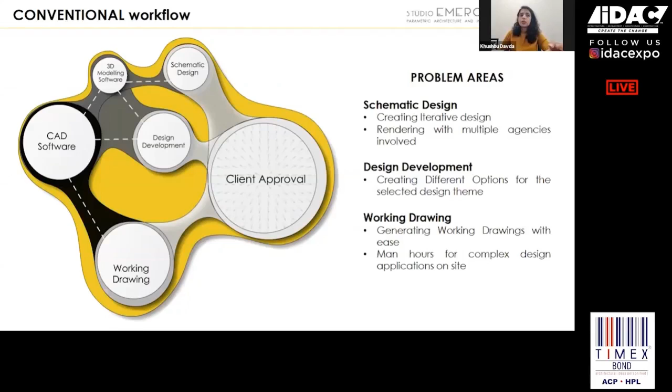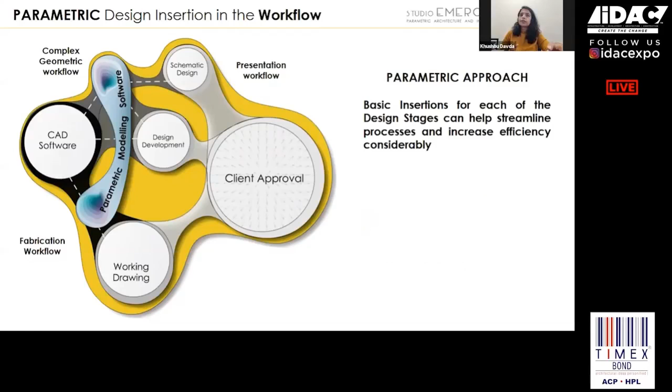But with the help of these newer technologies, called the parametric design approach, there can be a feedback loop in such a way that all of those processes which require a little bit of intervention - where there are some site changes or some programmatic changes which require changes in the design itself - this can be algorithmically approved, in such a way that you decrease the time, which also leads to a decrease in your cost.

Because the most important aspects in any building construction are A, material, and B, the timeline. So if those two things are taken into consideration, parametric design and BIM technology, both of these, when they work in a feedback loop, the output that comes is the most optimized version of the design process.

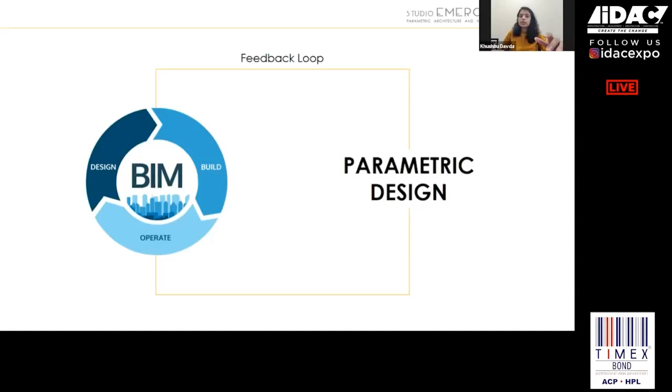When BIM was completely new, the early adopters actually gained a lot from BIM technology, because they could create really informative 3D models which helped in the final construction. What parametric design does is help even those BIM components, making them adaptive and creating a whole system, almost a virtual system, which can be adopted in real construction.

The first thing on the drawing board is called ideation, which happens only on the drawing board, where your architect, structural engineer, and all the people involved, even the client, are actually involved in the ideation stage.

When it comes to the implementation stage, we involve the other vendors too. Once everyone is on board in the implementation stage, you also want to educate, because once there is more awareness of why you are creating that kind of feedback loop system throughout the entire ecosystem, there will be more and more adopters of this kind of technology.

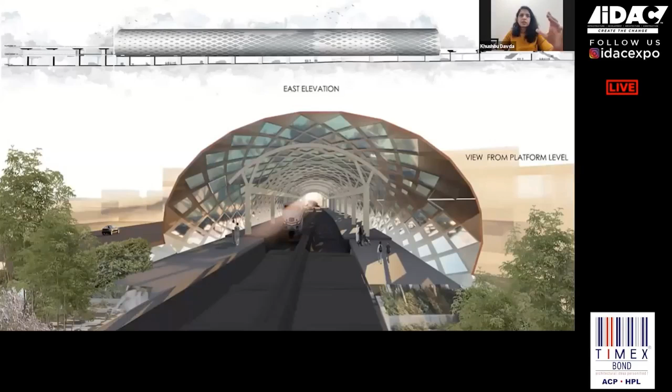So this is an example of what we did with this kind of technology. You can see this project, it's the Andheri metro station, coming up on line 7 in Mumbai. What we did here was just the facade.

You can see there is a standard prototype of these portals which are coming across Mumbai - these arched portals you can see in the center. There are 4 metro stations that were given out by the MMRDA as a design competition, and we won this Andheri metro station.

What was the concept behind this: usually when a metro station of this kind, or any infrastructure project, comes up in the middle of the city, the privacy of the buildings around it is really hampered. So we thought, why not take into consideration the people who are actually living around that right now.

If you see these apertures, we have given them in such a way that their size is directly proportional to the distance from the buildings. So if you see these two sides, the buildings are very close, so the aperture sizes are really small, and you can't hardly see anything inside.

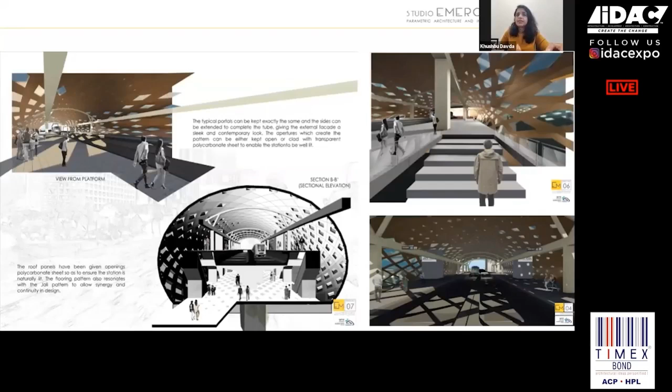Whereas over here, there is no building on each side, so the aperture sizes are big, which also results in giving a very dynamic looking structure and creates these dramatic shadows, which can create a pattern on the inside of the station.

We have given these glazing details, and the different sizes can of course be fabricated digitally and added onto the facade of the metro station. We are hoping that this will finish construction by 2021.

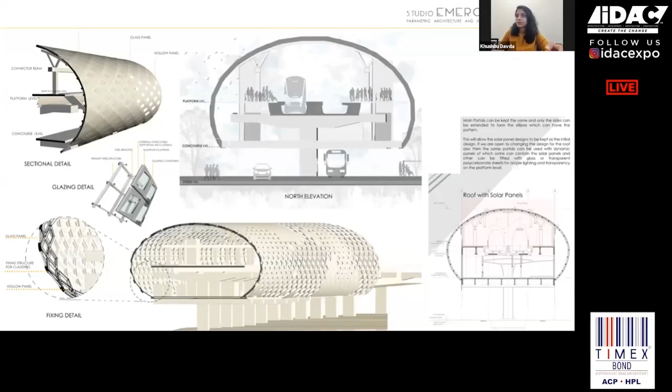So going to optimization of form. We already saw how we can create privacy with the help of this kind of technology. Optimization of form is really necessary.

This is a building in Marol called Raheja Platinum, done in conjunction with IAG Architects. We were the parametric consultants for this. The problem was this building was almost already constructed, and we had to do this Corian cladding on top of it.

Now, Corian cladding, as you must be aware, is a very expensive material. So creating an optimized version for this building was really important, especially because the water tank and everything was already built. The original design proposed by the architect was not really fitting because there was some mistake on the site with regards to the OHT, so it was coming a little outside.

It's a very common phenomenon - we have always seen that Indian contractors make some mistakes on site, and of course it's human. So how do we correct that? To do that, what we did was create an optimization algorithm.

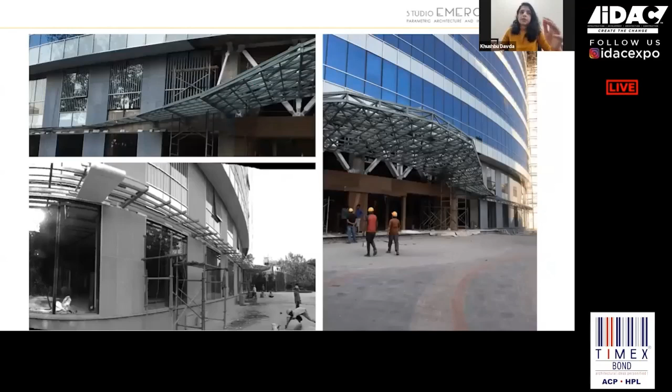We also did the canopy for that, but this was from scratch, so we had a free hand to do any design which was possible. And of course, we have used Corian, so doubly curved surfaces are very easy to do with Corian. This is how the building is completely constructed, and right now WeWork has occupied this building.

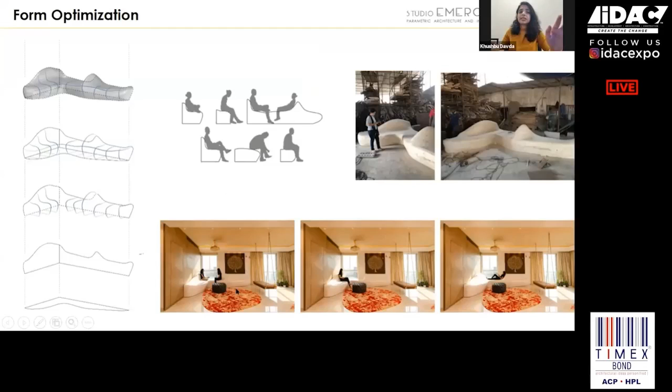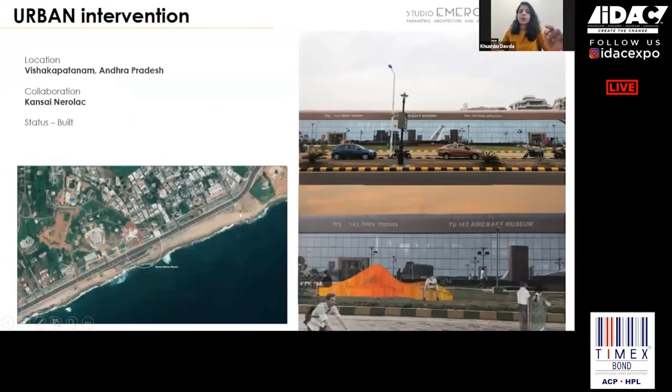Similarly, what we do is we keep on doing these experiments to understand what we can use in a facade. These are cement composite panels which we have created for an urban installation. This is outside a museum in Vishakapatanam, one of the most famous museums, which is the Aircraft Museum, and there's a submarine opposite of that.

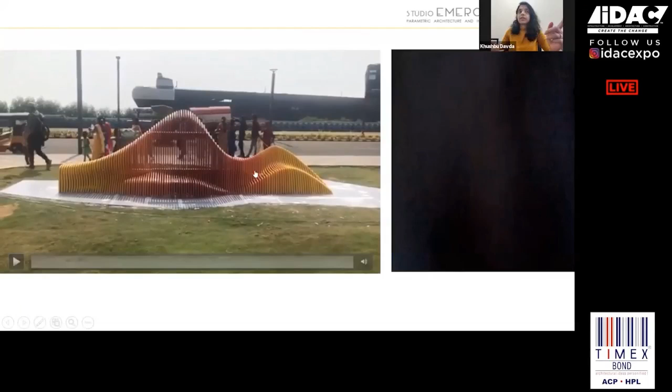This is a very widely used public space, so we have created these really colorful cement panels. This can also be used on facades. This was an experiment done with Nerolac for the CSR projects.

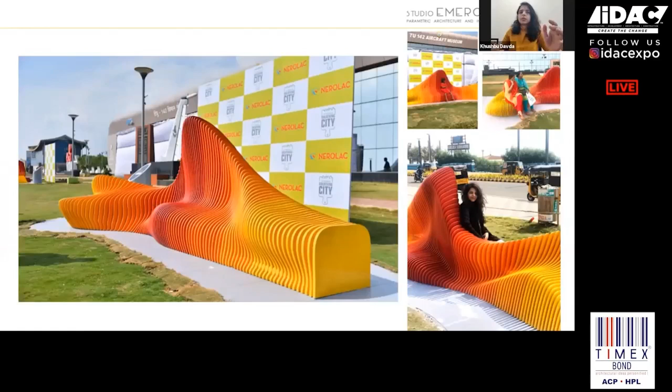We do a lot of these experiments because form finding is something which is really required at the conceptual stage. If you don't do that, you don't really understand how the structure can perform much better than it used to. So there's a lot of parameters that can be taken into account depending on the context of the project, obviously.

There is solar, there is a structural component, then there is panels, because the panel sizes of say glass or ACP or any material which we use, they are all fixed. So if we have that panel component also as a parameter, we can actually create the structure in such a way that the panel sizes will be optimized for that, similar to what you saw in Raheja. So there are all of these different techniques we use.

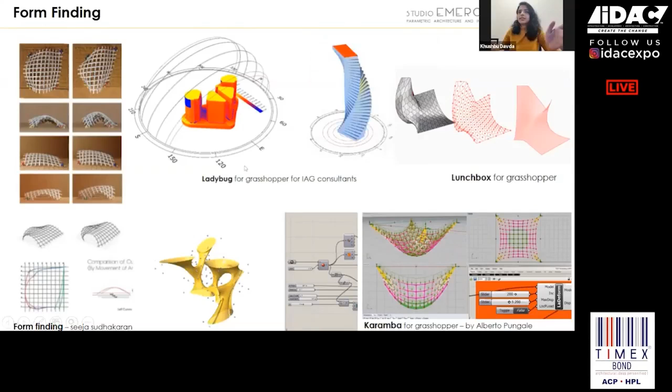I'm going in really short because we have limited time. Again, we are doing this project with IAG consultants where the building core is already made, the basement is already made, and the function of the building actually changed. So you can't really go back to the drawing board to understand what can happen.

So what we have done is, with the help of this technology, we have optimized what all you can do with the facade. We have given like these 3 options with the same kind of column placements. Actually, the columns only change on the upper floors, and there are a lot of possibilities which you can do with that building.

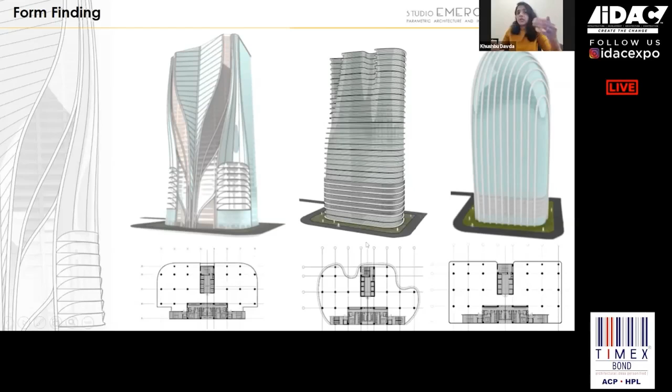This is a commercial project. It gives a more free hand to what you can do. This is a residential project. Again, this is a redevelopment project, done by us, and we are doing it with Sugee Group.

And redevelopment project, if you know, it's a very complex puzzle. So you can't really do much with the facade except for balconies. It's a complex puzzle, and you can see like a framework of the building, which is done with the help of BIM. And what we have created over here is parametric dancing balconies.

So when you go from Gokhale Road, which is a very central road in Dadar, you can see these dancing balconies in the form of these lines. And we have created those.

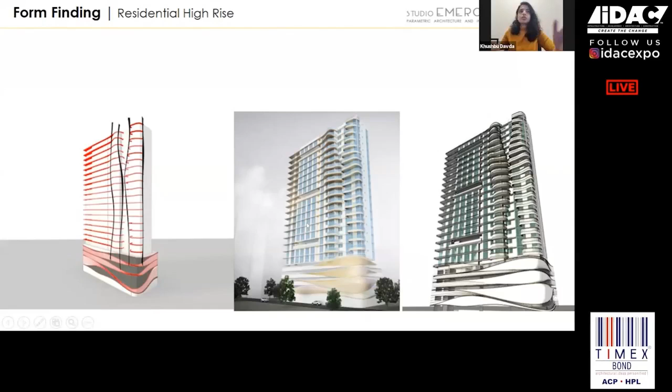And what happens with this technology is you can actually optimize or keep constant the size of the balcony. So suppose if the developer wants the balcony size to be 60 square feet for all the apartments, you can keep the size constant and just change the shape to create such a dynamic form in the facade. So there are a lot of possibilities which can be created with a facade.

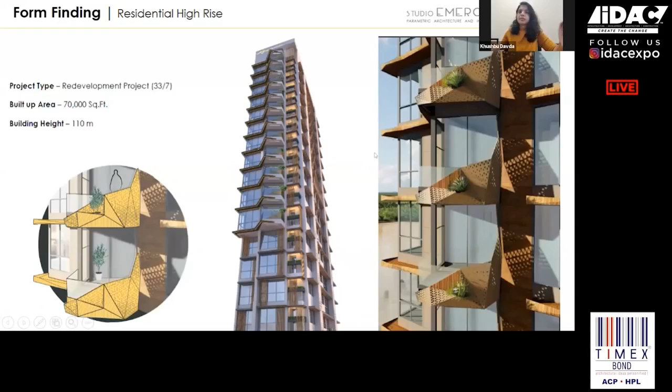Even a simpler version, like a tessellated facade, which is only optimized for sunlight - wherever there's more sunlight coming in from the south region, you can increase the size of the balcony and create these metal jalis, which will create dynamic shadows inside your balcony. And the rest can be simple. As Mumbai DCR is very strict, the rest can be kept very simple.

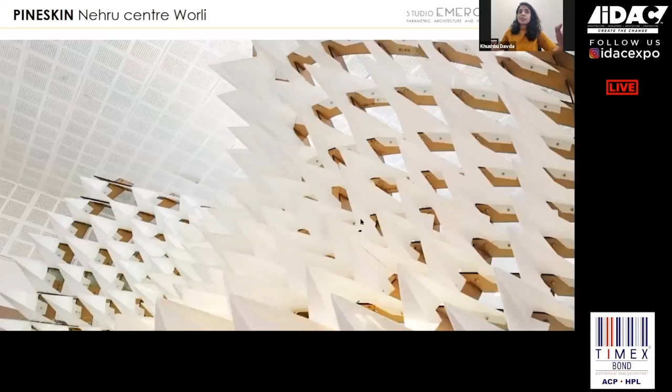For emergent patterns and solar optimization, climatic intervention is the most important. While we do a lot of studies in facade technologies, we have tried to understand how we can create new components in different materials which help in creating facades that are dynamic looking, but not necessarily moving. You definitely have a lot more economics when it comes to countries like Dubai, where facades can afford to be moving, whereas in India we haven't reached there yet.

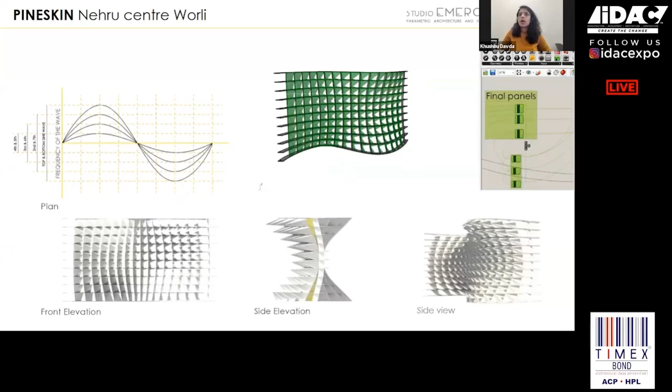So what we have tried to do here is understand optimization, that in a given region, if you want sunlight to come in maximum during the winter and minimum during the summer, how do you do that? This experiment was for that, and it can be applied to a larger scale module of, say, a commercial or institutional building. We did a small prototype to understand this.

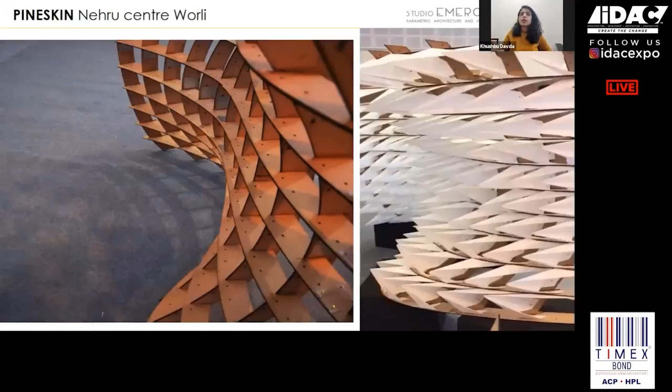We have used this sine curve, which was a self-stable curve. There was no support required for this. These cones are all digitally fabricated, each completely different in size, which gives you this dynamic shape. So there's a lot of prototyping and experiments required. At the end of it, you get a much more performative facade, which gives you a building that actually breathes with the humans inhabiting it.

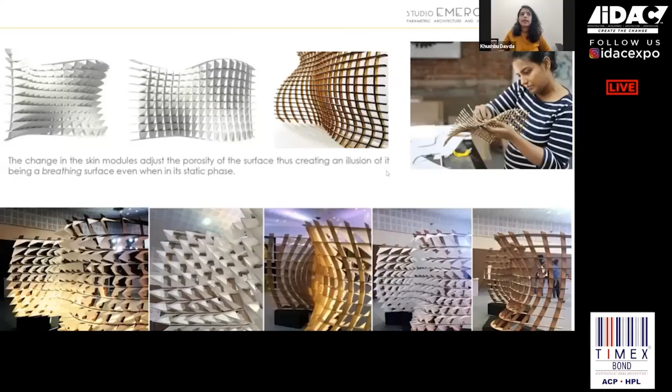So that's how I want to conclude. Collaborative practice is the future, and unless we all come together to create better and more performative buildings, we won't be able to get into a position where we are more sustainable and using as few resources as possible. That's how I want to conclude.

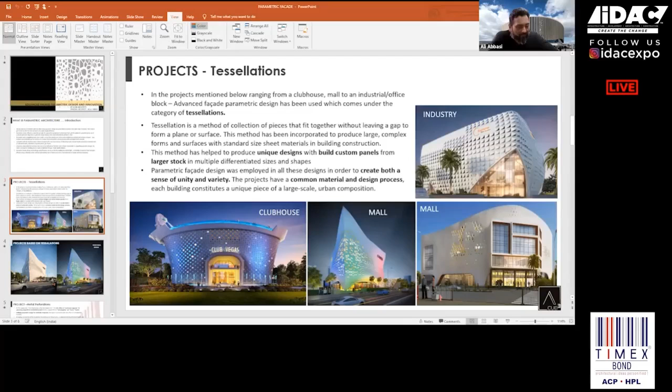If you ask many architects, everybody would probably have some kind of different definition, and that's due to the fact that there's a wide-ranging definition to it. So it's a facade in which the parameters are set, and they have a certain algorithm that is there. The parameters can be daylighting, heat studies, airflow, and these are basically analyzed and modeled using software. We can conceive forms that were previously impossible or impracticable to execute or imagine.

It's also because of the advent of computers that we're able to attempt these kinds of complicated forms. But at the same time, there's an improvement and increase in the ease and economy of fabrication of some of the newer construction materials. You have solid metal sheets, aluminum composite panels, FRP, GRC, Corian, and these kinds of materials which are easier to fabricate and construct.

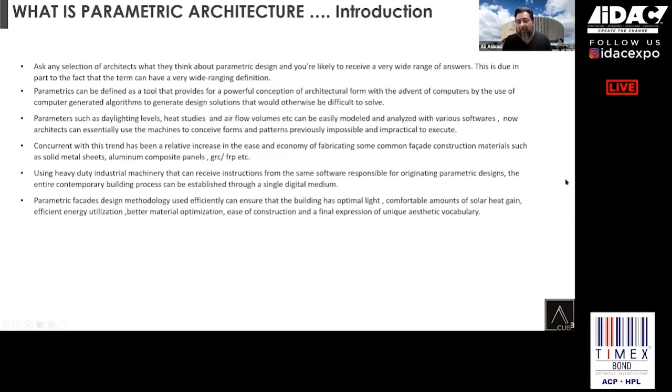And the software used to design these parametric designs is the same single digital medium used to control heavy duty industrial machinery, CNC cutting machines, and other machines that give you the accuracy and performance for doing a parametric facade. Overall, by using a parametric facade design, you ensure the facade has optimal light, solar gain or solar shading wherever required, and optimization of material use because materials are used more economically with minimum wastage. Over and above, you have a unique building which gives a very different aesthetic to the entire project.

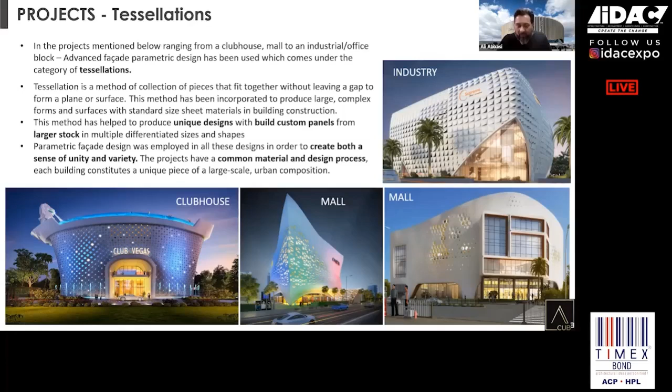Now I'll run through some of the projects we have done in our practice where we have attempted to work with parametric designs. These are wide-ranging. We've tried it in clubhouses, malls, industrial offices, site offices, and parking buildings. So in our own way, with whatever constraints are there, we've tried to come up with unique designs which have parametric design in them.

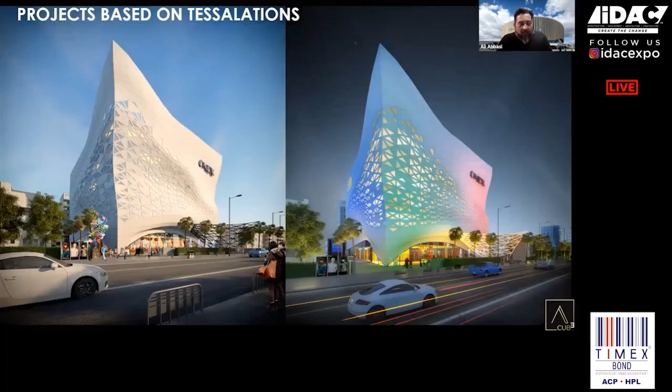So this is a mall we have done in Kolkata. It's designed in Kolkata and under construction, where we've used tessellations. Tessellations are a skin where we have various different sizes of cutouts and openings to ensure that the privacy and light coming into different areas is different.

And we have a play of light and volumes. In the retail areas where we want maximum visibility, we've actually created more openness. And the whole building has a different identity. The point was to create a very different identity for the building, which would be an attraction to the end user.

This is a clubhouse that we did the facade for, and it's a double skin with a mixed use. So you had banquets, gyms, tennis, badminton courts, squash courts - lots of different activities, each with a different use and different light requirement. At the same time, the entire facade had to be seamless and integrated. So we proposed an entire facade with these openings and fenestrations, creating a wrap around the entire building.

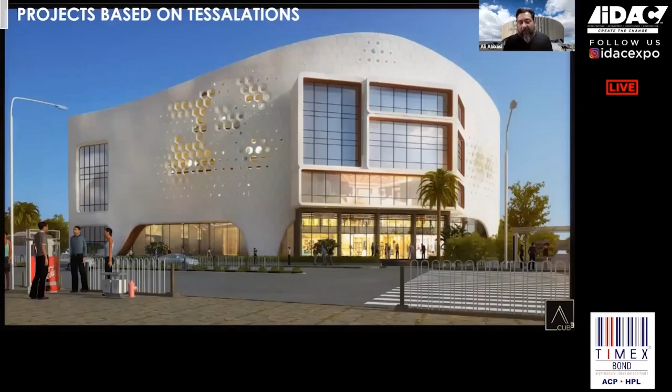This is another retail building where we've tried to have some cutouts and fenestrations and create openings to again give different purposes - visibility, light, and solar heat gain into the building.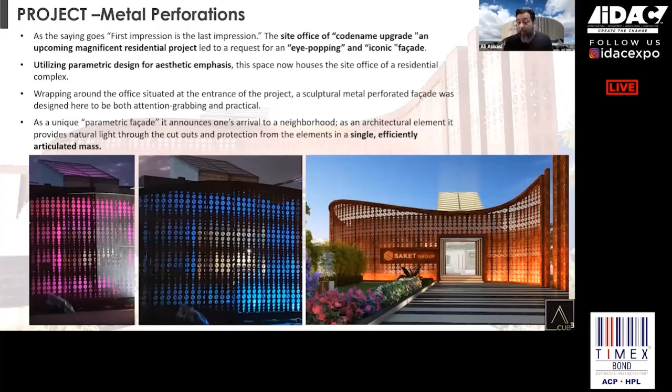So it creates this very exotic entrance which entices customers to come in and have a look at what's inside the building. Other than the normal light and other benefits, we've also got a very interesting looking facade. And at night when we light it up, the light adds another element to this whole building. And this is the executed picture of this building.

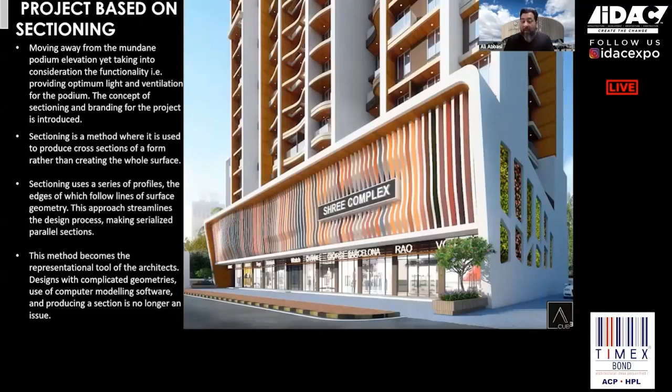So this is another building which was a parking block of a tower. The developer was very specific in saying he doesn't want a conventional facade for the parking block. So we came up with these fins which vary in their curvatures, which in their own self create this volume within. And we've played with colors on the block so that when you drive past, you have this splash of color happening, and the entire form is created with these planes.

The interesting part is that we worked this out using very normal construction Siporex blocks, cutting them with accuracy to get these curves for the entire facade, achieving this in a very cost-effective and achievable way.

So the whole point is that we want to do it, but with respect to the cost, to make something buildable. It requires that we do that value engineering to make sure that we can achieve these things in buildings.

Yes, definitely sir, and it was lovely to see all of your projects. We'll be doing Q&A after this, where we'll be asking a lot of questions on these projects too. Sure, thanks. I would request Mr. Gautam Bhasin, who is from Inhabit Group, an international facade consultancy group, to take it from here.

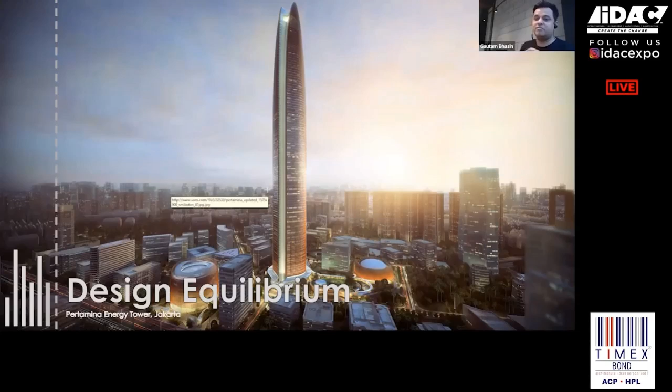But while all that sounds really great from an architectural and wind engineering perspective, it starts making life difficult for facade engineers. So what appears to be a building that's a straight extrusion for the bottom two-thirds starts changing form on the top one-third, where there's a sine curve which gradually reduces the floor plate size, but it also starts to lean back. So it's obviously forming like a double curve surface.

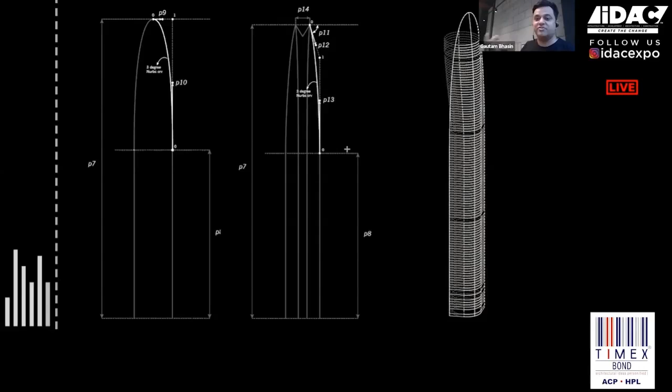And double curve is considered a bad word in the facade world, because every time you talk about double curving something, it means thermoforming - something we heard in Khushbu's presentation - or tessellating, triangulation, or other methods which are either an aesthetic compromise or frightfully expensive. And that starts getting some weird reactions from the owners saying we don't want to spend so much.

So what happens in the top two-thirds or top one-third of the building, which is a typical high-rise, about a 200-meter tall tower in Mumbai, placed on top of a 300-meter tall tower - it's basically a building above a building. So what's happening in this part is that it's reducing, leaning back, but also becoming smaller in shape, almost forming this double curve surface.

And if you try to use flat panel geometry - any material, aluminium or glass, you get them in flat panels - the minute you start to put flat panels, you'll suddenly start seeing this little shift that happens, which we call fish scaling on a double curve surface. So we figured out, okay, where do we start and what are the options, the alternatives, just so that the client can take a well-informed decision.

So when you try to imagine a big gym ball and you're trying to take playing cards or business cards and cover it up, you will start seeing a pattern like this emerging, where one corner can be joined, but then when you start pushing it closer to the surface, you start creating these triangular gaps.

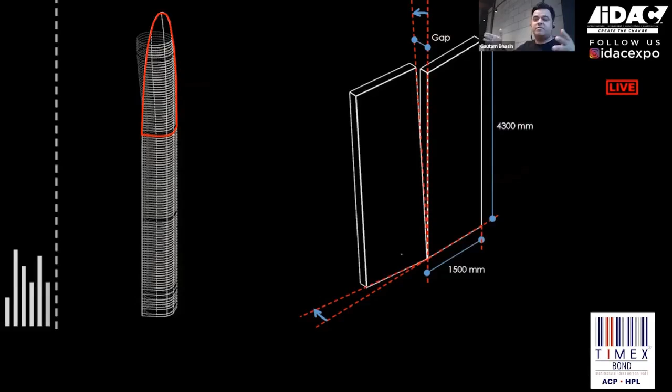So with a standard panel, floor-to-floor height of about 4.3 meters, panel modules of about 1.5 meter centers, we started looking at alternatives. How can we make this building airtight, watertight, highly manufactured? It's very modular, all panelized, comes from a factory, where you don't have the opportunity of sealing the building from the outside 300 meters up in the air. So what are our options in this case?

To wrap around a double curve surface, we looked at three aspects which are obviously very important. One is feasibility—can someone actually fabricate that? Second is what is the impact on aesthetics, because every time an architect develops a render, the client is sold on the vision. They know they would want the building to look exactly like that. And third, you have to really buy the material, buy the product, buy the facade for the building, so it should still be in some reasonable cost and should not cost you an arm and a leg.

So the first option we looked at was to triangulate it. Very simple—you have seams, you fold it over, and you can create that triangulated surface. While it's feasible, the aesthetics go for a toss, because imagine being inside an office building where every panel has a diagonal, which is a very weird experience from inside out. Outside in may not matter as much because it's sitting really high up in the air. And the cost is sort of still sitting reasonable.

You can thermally curve it. It will literally cost you a couple of organs of your body, where you have to thermoform double glazing, thermoform aluminum extrusions—very, very expensive. Aesthetics is a big tick in green because you get the surface you need, but cost, again, is very questionable.

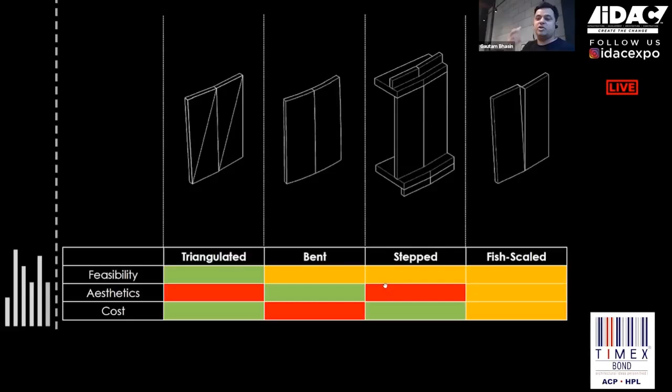And this actually helps us tick all three boxes. We're not increasing the cost, we're ticking the box from an aesthetics perspective, and it's also feasible because we're using very standard components. Again, in this case, it required a big buy-in from a large part of the market—sealant manufacturers, glass manufacturers, aluminum extruders, everybody had to buy in that, yes, I can bend it.

I haven't bent it before, but I can bend it and it works. I can still provide you warranty that the glass won't break, that the sealant will be able to hold the glass in position, etc.

So this was almost like going back to the entire supply chain. Based on the amount of stress the glass can take, based on the amount of stress silicones can take, whether the panel can hold itself up, we basically rolled the entire process backwards, and we came up to a number that you should be able to push a panel that's 1.5 wide by 4.3 tall by about 20 mm from one corner without having to do anything to that panel.

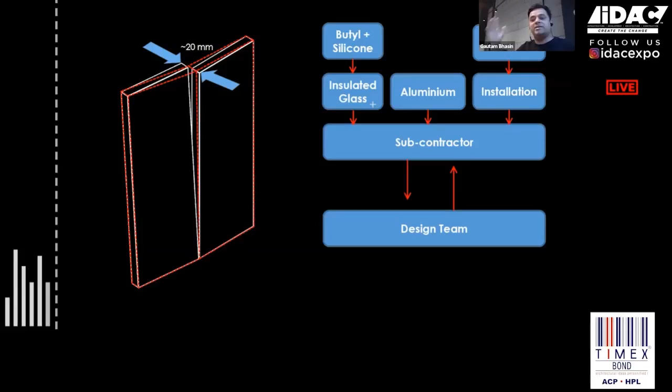So then the challenge was to actually start using the 20 mm warpability and then try and place the panels across. So we basically arrived at a panel module that was really optimum. It was allowing for 20 mm out of plane pushing at one corner. So that actually helps you cold bend the entire facade without having to do anything that's excessively expensive or not feasible. The other challenge, which I guess most of us are familiar with, is that...

Trying to optimize something for manufacturing obviously involves some level of intelligence play where you try and increase repetition in your panels as much as possible, which works wonders for manufacturers, which works wonders for fabricators, where they keep coming up with same size panels. They don't have to keep changing their machine settings every now and then to switch to a new size. Logistics works really well. One panel breaks, you have 5 spares that you can start installing.

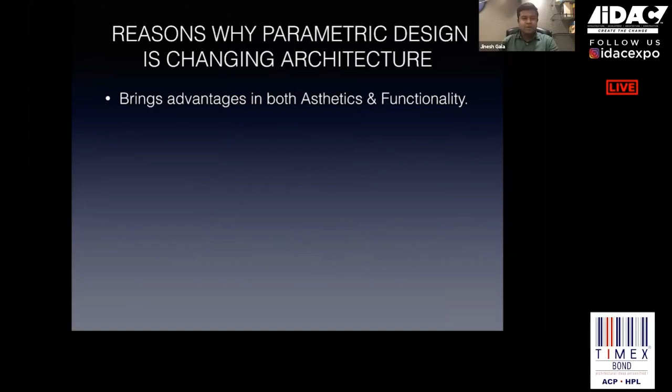First of all, it brings advantage in both aesthetic and functionality of the project. It offers a powerful tool to solve visual, material and structural issues, and even though a purely functional process will still be infused with the designer's aesthetic vision. While architects have usually formed individual aesthetic aims of their own, their design will have to solve real functional issues, and that's where these new methods come into play.

I believe today's time is the third industrial revolution, because this third industrialization is one of robotics, computation, and mass customization. Architecture will need to adopt these new processes of scripting languages and understanding of these digital processes and manufacturing.

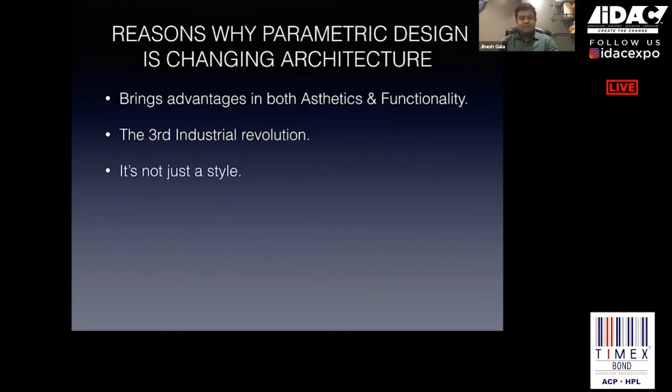Also, I believe it's not just a style or a word that feels good about. Style is always changing and following trends and fashion. I see this use of parametric design as tools and methods in the process of making really high quality and innovative buildings for contemporary society.

It allows us to manage complexities and deal with complex issues when designing big buildings or executing them. In today's time, architects are integrating these processes into all aspects of their work. Parametric architects deal with so many factors like the program, site context, user interfaces, environmental factors, material technologies, and manufacturing. It is a lot of work, and parametric design helps manage all these factors.

Manufacturing and material science: I believe research into material science and manufacturing methodologies is a growing discipline within architectural academia. A basic example is CNC machines, and how widely they are being used now, opening up possibilities for more adaptive design solutions.

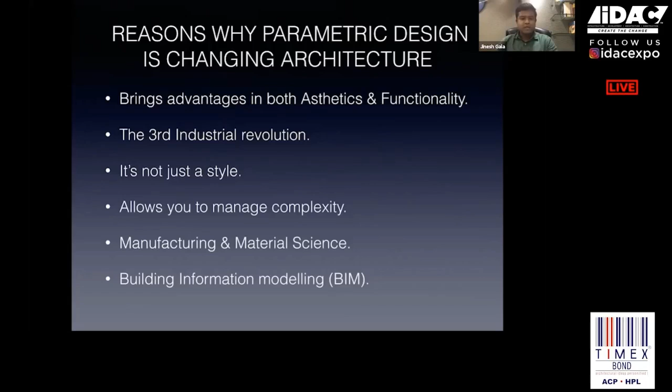Khushbu ma'am also spoke about BIM. Most designers who really look hard at their future see that, in one form or another, computational design is an inevitable part of the profession now, and BIM and other automated methods are slowly taking over the standard office tools in today's time.

We are manufacturers of one of the most widely used facade products, that is ACP. We also manufacture HPL. Since we're talking about parametric designs, I would like to talk about the fabrication capabilities of a product, because it is really important that the product is versatile in terms of fabrication so that it can achieve the design of the building.

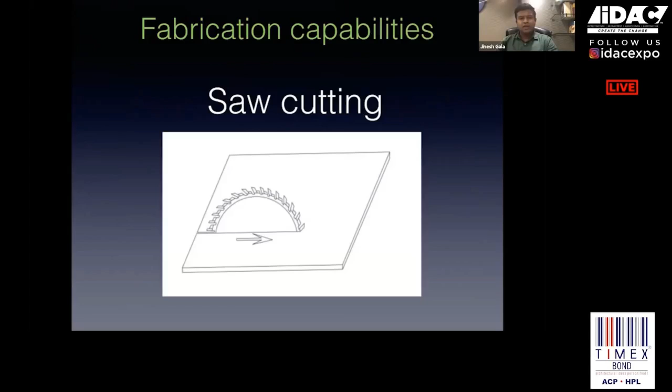Now, I would like to show some fabrication capabilities of ACP particularly. As you can see, this is a very basic method of cutting, saw cutting. You can cut ACP into any kind of shapes. It is CNC friendly, and being CNC friendly, you can get infinite numbers of designs out of the sheets. In today's time, I'm seeing so many designs where ACP is cut into different shapes and used, and it looks very beautiful.

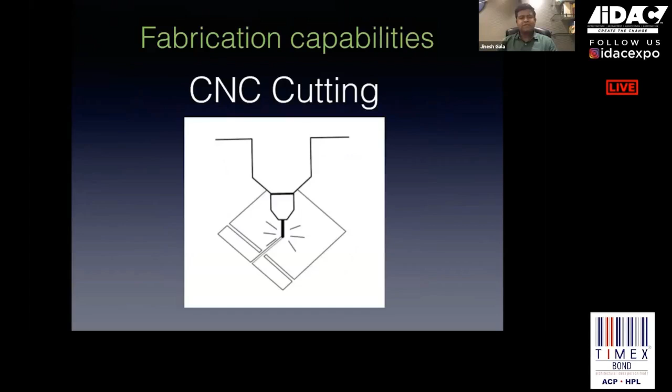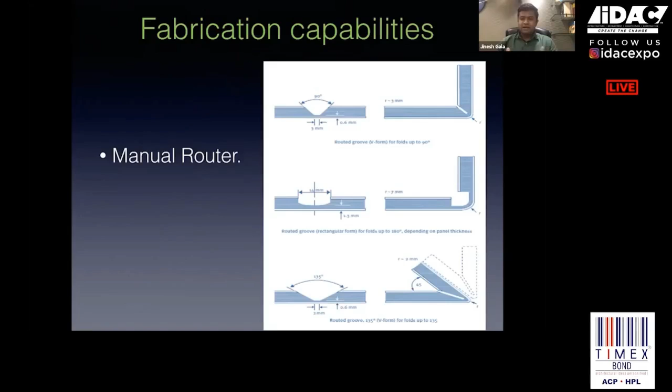Here you can see that ACP can be routed and bent into different angles, which really gives a lot of options while designing the facade, with different curves and different angles that can be achieved while bending this product.

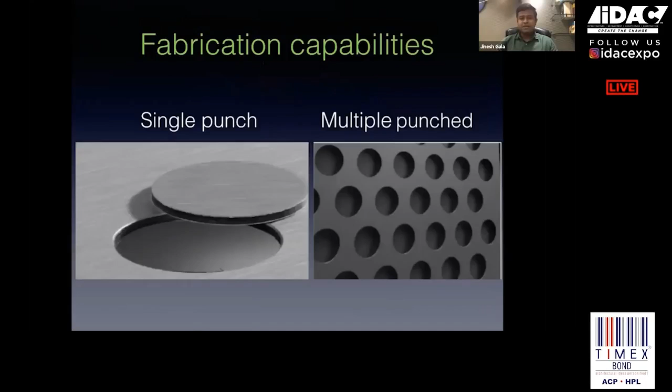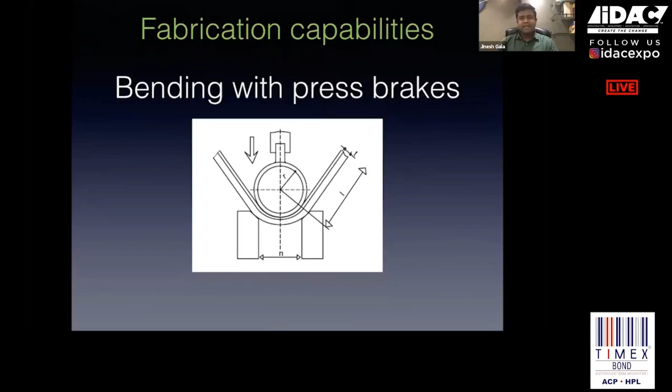You can punch it, giving it a nice single punch or multiple punch, a nice perforated look to the sheets. You can bend it to different angles, and there are different ways of bending it. As you can see, the sheets are bent into different angles using press brakes, and you can also bend it with a 3-roll bender. All this machinery is widely used by fabricators too.

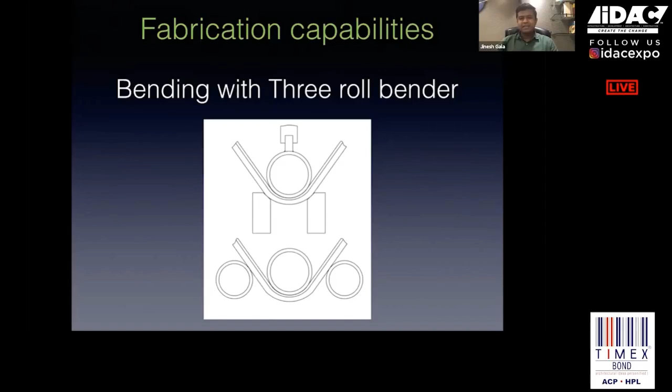As you can see, with all these capabilities we can achieve really good results, like the CNC machine cutting, using ACP in a complex, nice design.

Being a manufacturer of facade products, I always believe in producing materials that have high capabilities while fabricating them, to show that now that designs have evolved so much, the products can help in achieving those designs. Here are some examples that I've seen and take inspiration from.

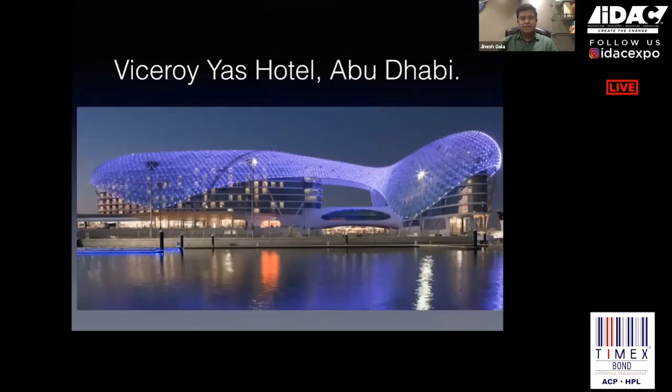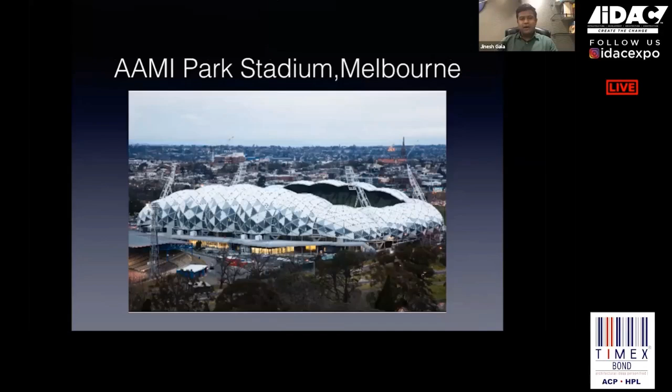This is the hotel in Abu Dhabi, and you can see how beautiful the building looks because of the parametric designing. This is AAMI Park stadium in Melbourne, and this is one museum in Mexico. I am already seeing such buildings in India, and I'm sure I'll be seeing more of them in India as well.

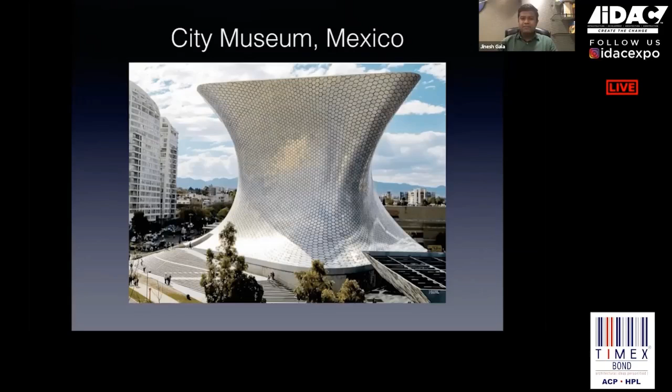We are also looking forward to manufacturing such products in terms of design and performance, where we can be more and more helpful in achieving these kinds of designs. So that's it from my side. Thank you so much.

Thank you so much, Jinesh. I'm really glad that TIMEX Group is helping manufacture these kinds of versatile products for all of us to use in the panel. I would like to extend this question to Mr. Jinesh: how important do you think different fabrication processes and innovation are for the future of architecture in India?

Well, definitely it is very important. As I mentioned earlier, customers' requirements have really grown now, and so the designs of buildings have also evolved. Now we have really creative and different looking facades in India. So to properly execute these designs, our fabricators in India really have to innovate continuously by using more machines for fabrication, and these days there are fantastic machineries available for sale.

I often visit many factories of the fabricators, and they have really good machines now for the fabrication work. Also, these types of innovation save a lot of time for the fabricator. In the building industry, each and every day is important in terms of saving cost. A delayed project will increase the cost. Hence, when we talk about completing facade work on time, fast and innovative fabrication techniques come into play. So I feel it's really important.